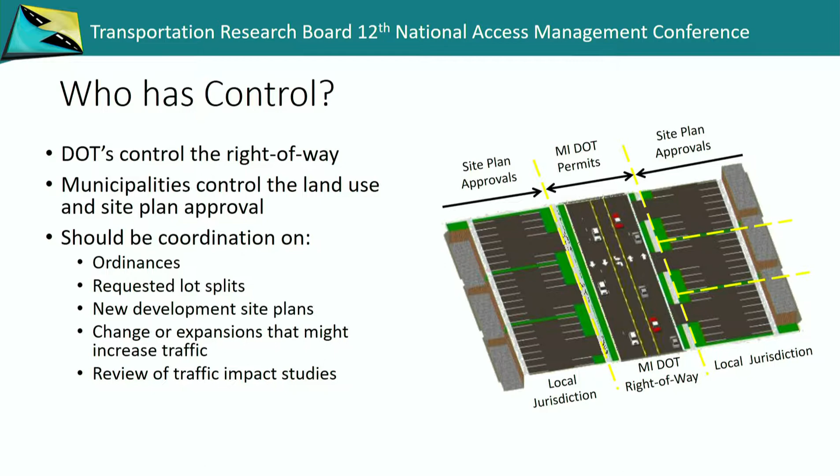The state tried to put some financial requirement on the counties to get certain funding - you had to have an access management code. I've worked with a couple of counties up in the Akron and Canton area.

I thought Summit County around Akron was pretty interesting because they wanted to have access management standards based on context or land use, so they have a lot of variation. There's actually a national park, Cuyahoga Valley National Park, in that county. A lot of variation in terms of context - rural areas, semi-rural, suburban growing, suburban declining, suburban stable, small towns, and a relatively big city, Akron.

Rather than just coming up with access management standards for county-controlled roads, since they didn't want a lot of variation, they worked early to get the cities and villages involved, with the goal of coming up with a model ordinance and having the townships, cities, and villages all adopt the same standards as the county, so there'd be consistency. A stakeholder committee of attorneys, developers, and major design professionals who work for developers gave their input, making compromises and getting education out there so everyone would be on the same page with access management, training officials and staff.

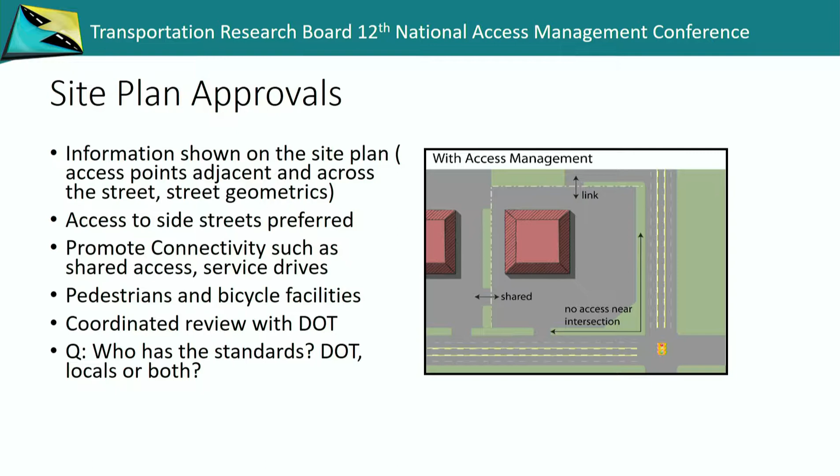That's one of the main things Michigan has tried to do, but not as effectively as Ohio - having local units of government alert the DOT or the county that controls the right-of-way, and having consistent site plan review standards, with the local unit of government looking ahead when approving lot splits or something just on the corner. If we don't have plans for the parent parcel, we make sure there's an overall access management plan for the whole parcel, at least a concept, before approving a lot split or the first site plan.

Another thing in Indiana and Michigan, and maybe not quite as much in Ohio, is the question of what access management really is. Because of tension with economic development and maybe a lack of support at the upper level on access management, there's been more focus on management rather than perfection or strict adherence to standards - looking at situations case by case to find the best solution. So there may be real effort to avoid offsets or driveways in the functional area of the intersection, but maybe not as much push on driveway spacing on the same side of the road.

I think in the Great Lakes there's probably not enough support or push for alternative access systems - frontage roads, backage roads, service drives, some deep-throat designs - things that in a lot of states are just common in access management, done by nature, and developers are used to it. It's a harder thing to get accomplished in Michigan, Indiana, and Ohio.

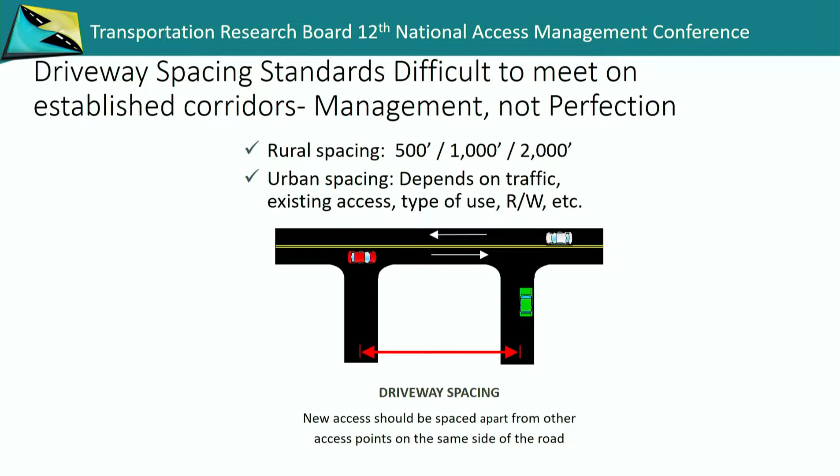They have a redevelopment ready community program that's really encouraging redevelopment of the cities and towns in Michigan. Some of us have been involved with that, and they've become supportive. Initially they were opposed to access management, but now they've become supportive once they realized the benefits: revitalization for pedestrians and bikes, reducing crashes, preserving flow. Teaching them the benefits, this isn't an anti-business aspect, this is pro-business, this is pro-safety.

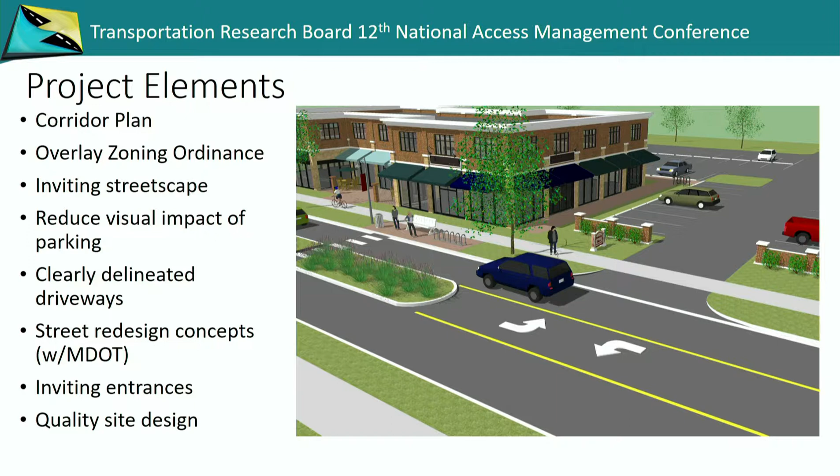The results of these kinds of plans come up with illustrations like we saw earlier in this session. How do the buildings change over time? How does the roadway change? How do you put in pedestrian crossings and sidewalks and bike facilities? Where should parking be? Access management and connecting driveways is just a component of these more comprehensive corridor plans. As we saw in the first part of the session, there's power in graphics and simple graphics.

I think when Frank said people remember 80% of the graphics, 20% of what they read, and 10% of what they hear, that's about right. So these are some examples of how access management changes over time, and also the power of graphics.

This is a project in the Lansing area. Twenty years ago, one of my access management projects was for this corridor, M43, which runs from Lansing east through Michigan State University's campus in East Lansing. We came up with an access management plan limiting driveways, having frontage roads, and so forth, and it's worked pretty well over time.

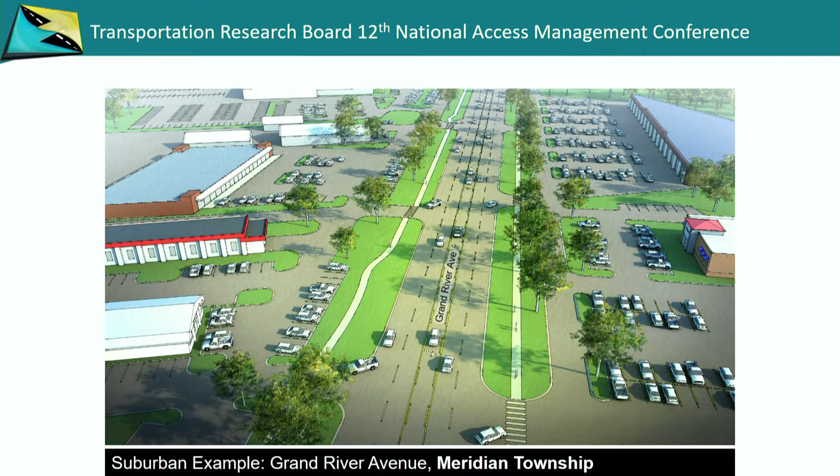But now this township, to remain viable, wants to have redevelopment. They want buildings closer to the road, mixed uses, and so forth—changing from a very conventional suburb to more of an urban-type suburb. This is the existing condition, you can see the frontage roads along both sides of the road. We were asked to figure out how to get these frontage roads to adapt to the new vision for the township, but still provide that access management function.

So the idea is, as new development comes in, what happens to these service drives? We're keeping the service drives, but changing them to be more like slip roads or access roads—paralleling the main road, but allowing on-street parking and bike lanes, so the conflicts aren't out on the main road. The service drives that currently just connect businesses and limit driveways will now accommodate parking, bicycles, sidewalks, with buildings built up close. Having those service drives has been great for this township, and now they're just going to repurpose them—they'll still provide the access function, but also other benefits.

We put these illustrations together—done by Dover Kohl, who's on our team out of Miami—showing the transition over time, how the service drives will be adapted, and eventually this could be a bus rapid transit corridor in the future.

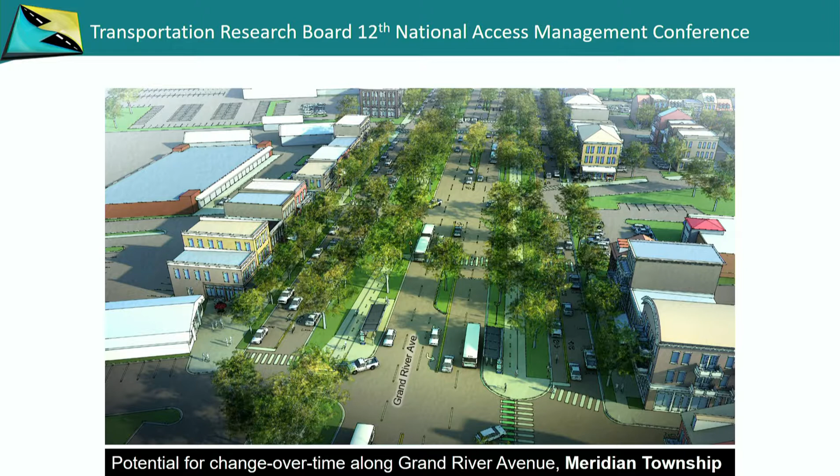I'm also working in Detroit on the Detroit Downtown Mobility, Parking, and Access Plan, and I had never done access management in a major city like Detroit before. What I've confronted is very different than access management in places like the slides I just showed, and Chuck will talk about. So what is access management in Detroit? Detroit is fortunate now to be on the rebound, with lots of cranes and development going on.

We used to have level of service A about 10 years ago because there was nothing going on, and now we actually have congestion—I think even the DOT is coming around to thinking congestion is a good thing. We don't want to go back to level of service A when all the buildings were empty. So what is access management in Detroit? Well, one of the things is we have a lot of parking lots, and the parking lots have wide open driveways, so pedestrians have to walk along the front.

Cars are used to going in and out. When the economy was bad, people got used to no regulation. The city had no permits for access or anything else, and now we're trying to tighten up those driveways to the parking lots and putting them on certain streets, not others.

Another aspect is parking structures. Some of the main congestion in Detroit, the downtown streets, the volumes are actually pretty low, but we have a lot of congestion because we have a lot of short signal spacing, but also a lot of big parking decks, and people queue up at them. So most of the AM and PM peak hour congestion is queuing at parking structures.

The city has no permit. They have very outdated technology. They just use the road to stack up. So we're working with the city to come up with a new annual permitting process that will fine the operators of the parking structure if they're queuing out into the street and causing congestion and safety problems.

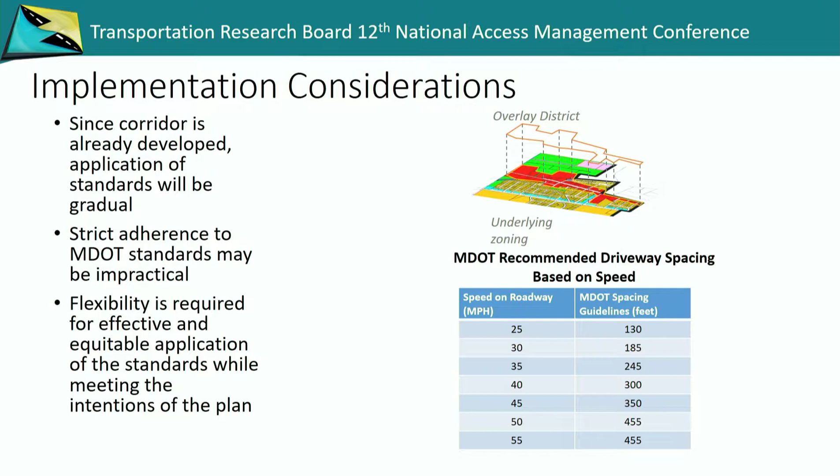The other thing talked about at a couple sessions is when you're doing preventative access management, thinking ahead to use good standards and apply them, but then trying to figure out when those pure standards don't work on a retrofit corridor, and coming up with the best solution. This takes more time and engineering judgment. We have a problem with some of the DOTs with a lot of turnover, more of a by-the-book approach and not a lot of experience in access management. So understanding access management and when and how to make engineering judgments is important.

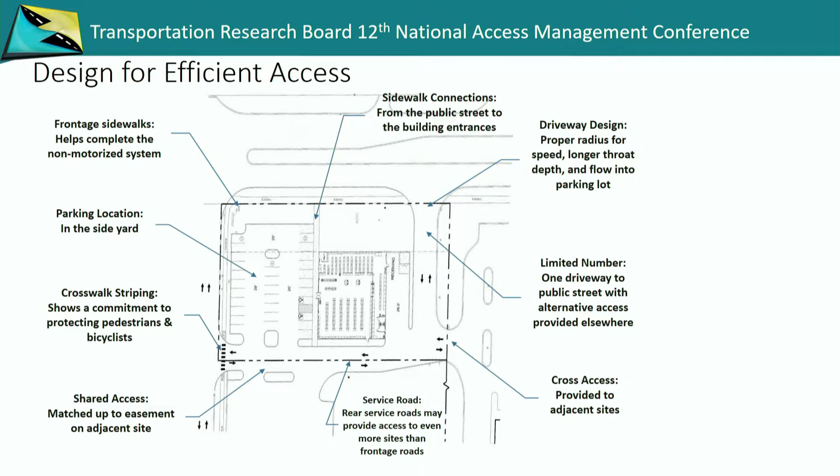Working with the communities to understand all the various aspects of site plan review and how they relate to access management, the consequences of what you decide on each individual site plan, how it affects the roadway, is important. So some of the lessons I'd take from my experiences working with officials and developers' attorneys, because I do a lot of that, is focusing on the safety benefits.

Even developers and developer attorneys, when you show some of the charts we see here at the conference on the safety benefits, they'll come around. Sometimes they're an easier audience to convince than some of the elected officials, frankly.

Using simple graphics, Frank talked about how to show things. I learned my lesson with the mayor of Detroit a couple weeks ago when we had beautiful renderings, and he didn't understand them, too complicated. So making sure the graphics are simple and people understand, avoiding jargon like functional area, level of service, and operations. Put it in terms people will understand so they don't think you're being condescending or they don't get it. So simple graphics, simple terms is important.

Showing examples locally is really important. You can show access management lessons from Colorado, Oregon, and Florida, but if you're working in Ohio, you better have examples from the Cincinnati area, Canton, or Steubenville. Having good local examples and data is important.

Some of the simple things are just simple graphics again. I used this somewhere in the session earlier today, showing how four corners aren't the same. Rather than graphics of functional area and so forth, just simple graphics to show that at two corners, a left in is going to cause a lot more conflict than the other two corners. Oh yeah, I get it. And photos in their town, like a car making a maneuver, the photos we saw or the video we saw yesterday of the Starbucks here in Wisconsin. Those type of graphics are very convincing for officials to use.

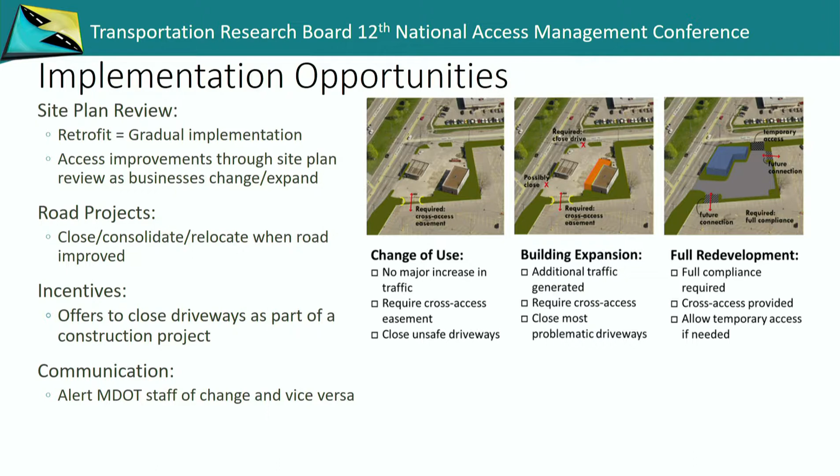So we talk about conflict management and access management. I think part of it is avoiding conflicts in the communication at the different levels of government by having good communication protocols up front. So that's kind of some of my experience across the Great Lakes.

Going to turn it over to Chuck to talk about applications in a specific Wisconsin corridor.

Thanks, Brad. I'm going to do this one a little differently, seeing as this is a National Access Management Conference. I'm going to wrap up this presentation with a case study. Brad's handing out some worksheets to you. I wanted to try a little micro exercise just to see, as a transportation planner, you're kind of a jack of all trades, master of none, right?

Well, this is a classic corridor preservation study, a classic corridor study that we did. Access was a strong component of it. I just want to see, with the expertise in the room, if we did the right thing or not, and how you guys might come up with it.

So what I'm going to do is, Brad's handing out some worksheets. I'm going to give you the background information, the context. We'll do a little 5-minute exercise, and we'll have a few of you maybe jump out, see what jumps out at you, and I'll show you what we came up with as part of the study.

I'm going to preface the Highway 33 study by saying that it has not been constructed yet. The study was completed in 2016, and right now it was just in the media. They're looking at some of the designs of the corridor now, so it's kind of in that phase of the process.

But Highway 33 is located in Baraboo, Wisconsin. It's about an hour north of here, almost due north. It's bounded by 90-94 interstate, kind of on the north side. Wisconsin Dells, this is the southern part of Wisconsin Dells here. US Highway 12 that you see running through the western edge of the village, they just finished a bypass corridor. So it's a freeway standard actually there, a bypass corridor that was constructed.

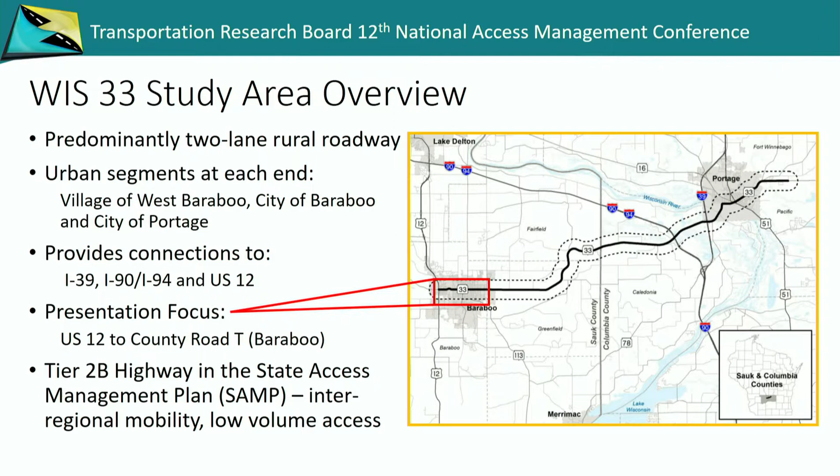So the reason we did this study, the overall was safety, but the data collection, we wanted to gather all sorts of factors, everything from environmental, social, basically your classic study to look at future transportation the next 20 years.

What can we do to maintain the existing facility for as long as possible, anticipating land use and growth changes, and access was a huge piece of that. So we start our studies with needs identification, go out to the community, identify what the local needs are, and then develop long-term strategies and recommendations. Part of this was an access management vision for the 20 years as the city were to transition.

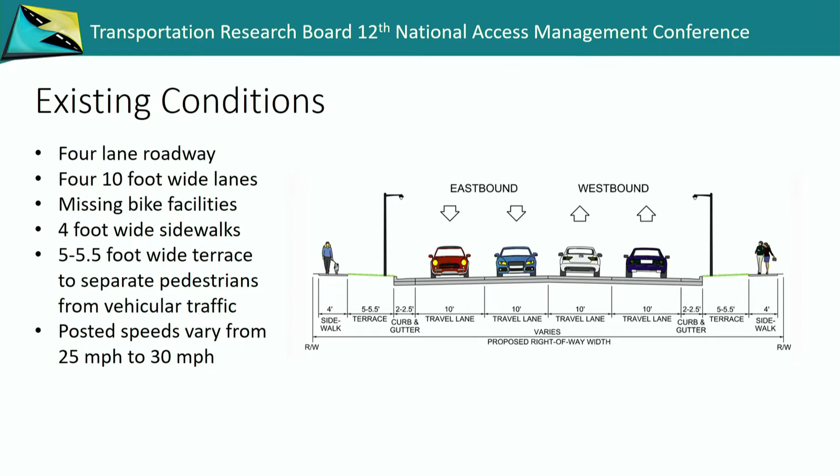The existing conditions: it's a 4-lane highway, urban roadway basically with four 10-foot wide lanes. There are no bike facilities currently on it. It wasn't really a consideration when it was first constructed and expanded. It's got 5 to 5.5 foot wide terraces for separating pedestrians, 4 foot wide sidewalks, so substandard there, and posted speeds through the corridor pretty much 25 miles an hour, but they vary in a few spots.

Here's some pictures of your classic urban environment as land uses transition over time, where you might have driveways located right in the turning radius of the intersection. Some areas still have beam guard right next to the curbs, that type of thing. Sidewalks that are right next and maybe elevated, no curb ramps, that type of thing.

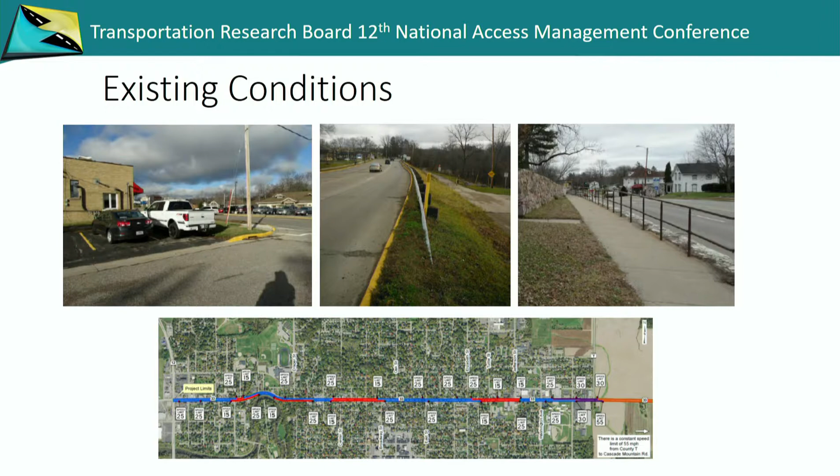It goes through predominantly residential, very good grid system. Housing here was constructed in the 1900s, 1920s, and the 1950s. So houses are pretty close to the highway corridor too. Between Highway 12 and County T is kind of our western boundary, or our eastern boundary.

There are 27 public road connections, so a pretty dense street grid there, and 136 private driveways within 2.5 miles. So a high number of driveways, very classic condition. Access points per mile comes out to about 65.2 just based on that calculation.

So they experience both urban and rural access environments. You've got some of the neighborhoods, some residential housing still located on the street, influx of realtor agents and things that have bought houses. There's some commercial operations on the far west side with big box retailers. The village of Baraboo has convenience stores, fast food, that type of thing. So a lot of mix of uses.

In terms of existing traffic, it used to have a pretty high trend in traffic in the early 2000s. It's pretty stable now, at about 11,000, and it's projected to stay in the 11 to 13,000 range, considering that bypass corridor.

Looking at the crash history, it's approaching, exceeding the statewide crash history, but it's important to note that 71% of all the public road intersections experienced crashes over the 5-year history I looked at. So even a lot of them are stop controlled. There's a few signals on the corridor, but a lot of public road connections experience crashes. Not exceeding crash severity or injury, but approaching it - basically a low speed corridor, but definitely exceeding what we'd expect on similar highways.

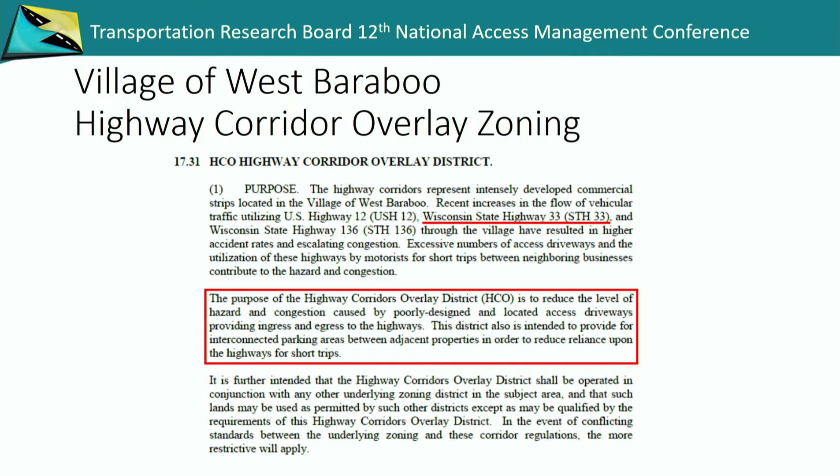One thing I'll leave you before we go to the exercise: the village of West Baraboo actually has a highway corridor zoning overlay district. So when future development comes in, they have to consider cross-access agreements, driveway spacing, and things of that nature. So they have that ordinance in place.

So with that, I'd like to take a few minutes for you to look at the sheet in front of you, and I'll put the map up here as well. We'll take 5 minutes to review the segment map you're given. You can use that to make notes on, not critical. But what we're going to do after that is have the mic come around, and if something really is jumping out at you - as I've done this in other cities, I know what the solution is to this - I kind of want to hear that. We'll take one or two of those.

He's got the answer ready. No, it's just the cross-section - it's hard to see. Is the cross-section all paint, or is it raised in any manner? Just a 4-lane? It's all paint. 4-lane paint. Yep, yep.

And so we'll take a few minutes to take a look at that, and then I'll have Brad or our facilitator walk around, give you some time, and then I'll show you what we came up with as part of the study process.

Quick question about the crash information - do you know what the predominant crash type was? A lot of rear ends or angle crashes? A lot of both, yeah - rear end collisions, right turn rear ends, angle crashes, rear ends in the corridor, and some left turn outs. Speed was about 35 mile an hour, with traffic speeds around 25 to 30 mile an hour.

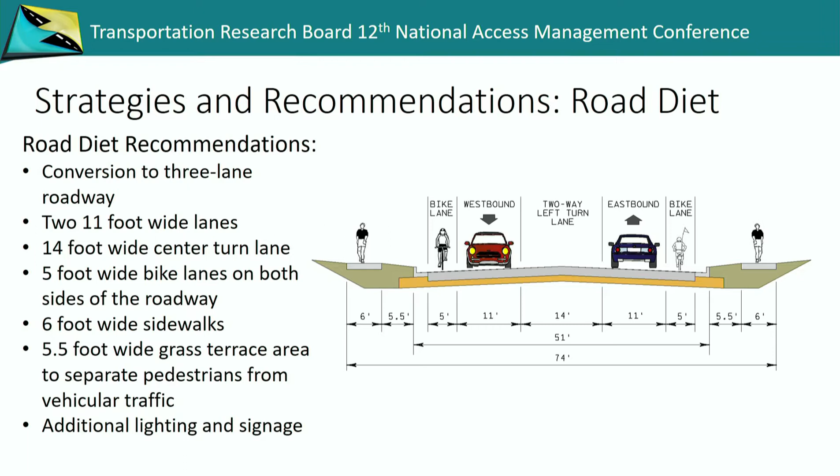So we did go with the 3-lane with a twiddle lane. The other opportunity that provided, which I'll talk about down the road, is some of the other recommendations we looked at in terms of access, namely consolidation.

One of the challenges is you have residential, narrow lots, close frontage, so you can't go in and deal with individual accesses necessarily. But they had a good parallel alleyway system from the older housing stock, and a lot of the garages were detached, so there might be opportunities to shift some of that access to the rear. Those are some challenges, obviously.

Looking at consolidation in a transitioning corridor, we see more commercial trying to move in as developers come in, kind of what West Village or West Baraboo did in terms of the overlay, looking to consolidate access and push development back if they're going deep into their lots they're purchasing, to go back to the roadways behind.

When they did the overlay to help control the change in use, was there pushback from the residential owners who saw commercial value? Let me do that again.

On the overlay district, which restricted what they could do with their property or made it more difficult, was there pushback from property owners saying we object to the overlay district, it's a taking, we can't go commercial? That was in place before we started the study, so...

So you didn't do it, the city did it? The city had that in place ahead of time. And that part, that's good to note, is already pretty much a lot of commercial already in that piece of the corridor. The residential is more on the city of Baraboo side, so I don't expect they had a lot of kickback. I think they were reacting to a situation they already had ongoing over time.

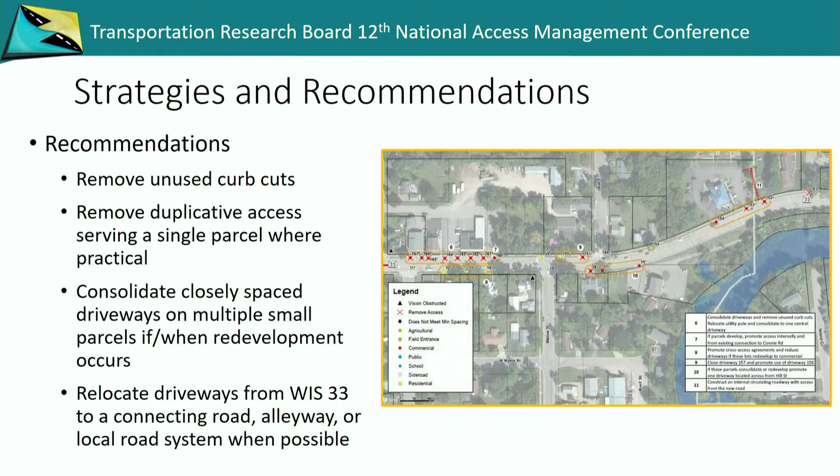Just to wrap up, I talked about consolidating driveways. Jefferson Street is on your map. There's a school on Jefferson, and you noted correctly that's an offset intersection. Those left turns create, as Brad showed in his slides, an issue, but it also created where the pedestrian walkway was. They have a pedestrian crosswalk on one side of the roadway because of that offset, because that's the only safe place to put it.

Because of traffic trying to make those left turns, if we put the pedestrian crosswalk on the other side, their solution was to not create the direct path where pedestrians are going, but push that crossing over where there are no pedestrians. So to fix that, shifting the roadway to make it a four-leg intersection was one of our recommendations.

Now they can put good crosswalks on both sides that are more directly tied to where pedestrians are actually moving on the corridor. Closing one of the roads, like Barker Street, was one of the recommendations as well. The three-lane cross-section also allows us to close off some of those offset, misaligned intersections, and put more of a median-type treatment through the middle using that center area, so we don't have to purchase additional right-of-way to treat those intersections.

You got an isolated raised median? Yep, in certain locations. At some of the busier intersections we have left turns and need to provide a left turn bay. Luckily, a lot of the offset ones were local stop-controlled streets some distance away from those intersections, where you could do that type of treatment. Yeah, it makes it a twiddle and dedicated lane. Yep.